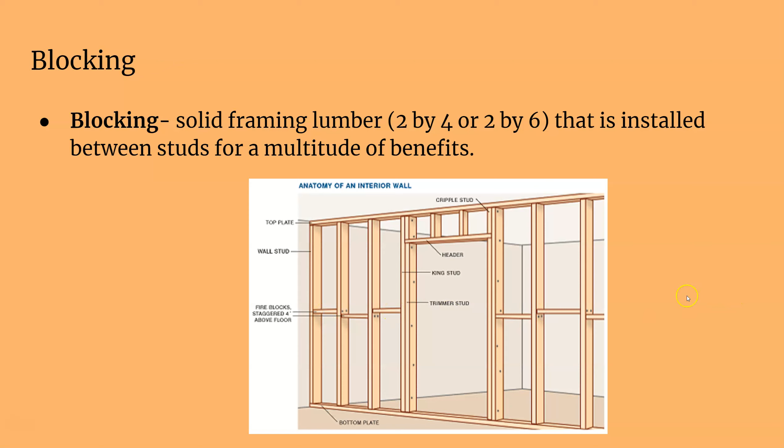For one, it stiffens up your wall. If you got an 8, 10-foot wall, 12-foot wall, those studs are going a long way from the top to the bottom with little to no support in the middle. Especially if you have long walls with no breaks in it, that don't have any doors or windows. You need something to stiffen those middle 2x studs up. So you put these blocking in, and it really shores up your wall.

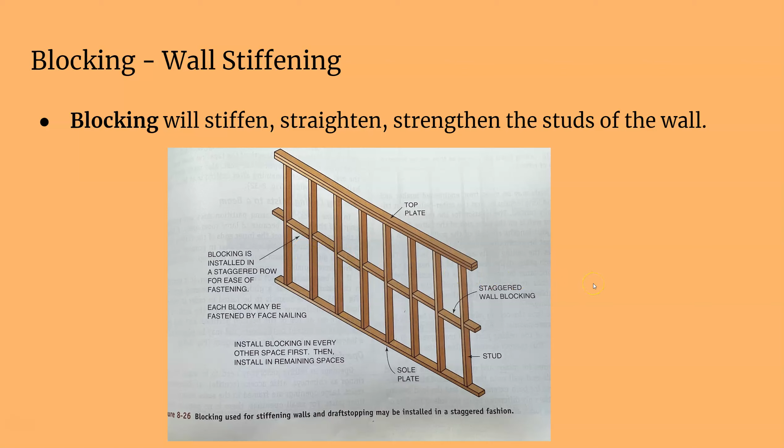The next reason is for fire prevention. So you put this blocking in somewhere in the middle of your wall, and if there's a flame that starts inside the wall, such as an electrical fire, the flame would stop at your blocking and have to burn that up before it reached over to your second floor. So that's why it's important to have your fire blocking. You try to prevent the fire from spreading to the next floor and from spreading more quickly throughout the stud bay.

Even though it's a wooden block, if the fire takes 5 minutes to burn through that block, that's 5 extra minutes to put out the fire or save someone. So it's good to have that anytime you have to save people or do what you gotta do during a fire. Anytime you can save is good.

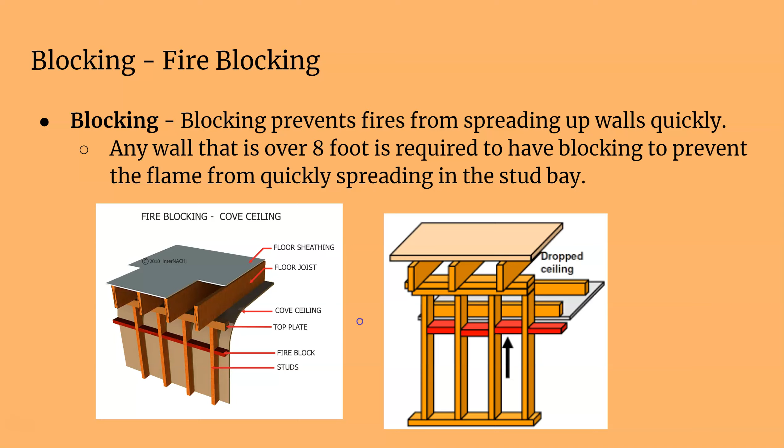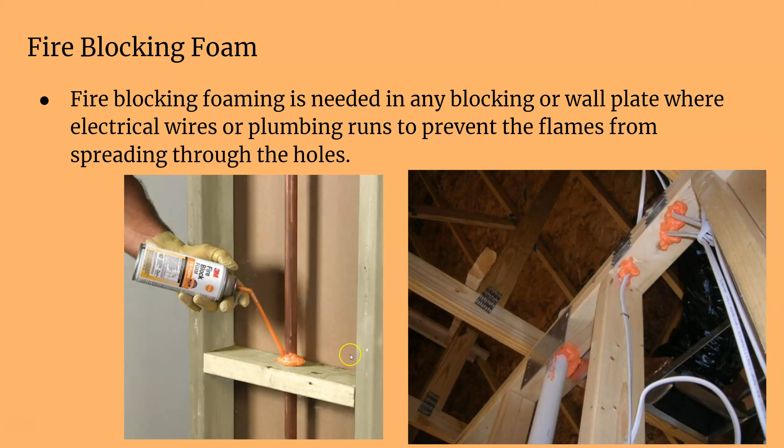So what about these pipes and everything that's running through your plates? You have to actually spray that with fire blocking. You create this airway when you have wires coming through, here, and here for your outlet, and air is breathing through it, and that's just fanning the fire more.

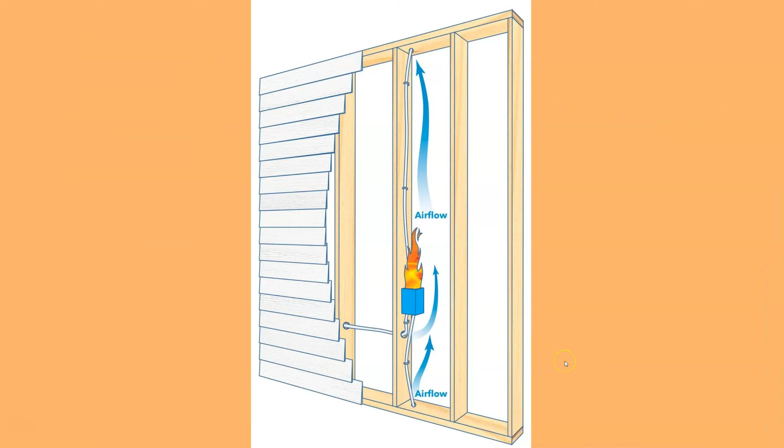If you seal that all up, the fire has no oxygen, because remember this is sided on both sides. It's not sealed perfectly tight, but it's sealed pretty good. The amount of oxygen to keep that fire going will be drastically eliminated. So you can spray this fire blocking foam around your outlets, around your plumbing, so that fire does not spread throughout your stud bays.

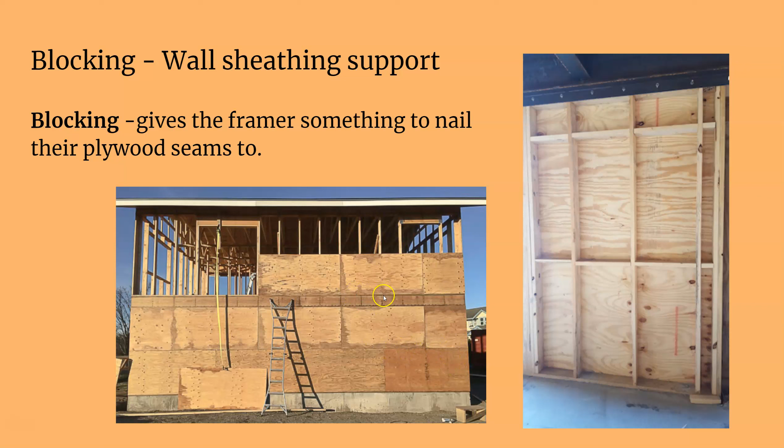And the other is a practical reason: you can nail your sheathing. This is a tall building. It's not like you just stand an 8-footer up and it covers everything, so you gotta go horizontally. And each one of these seams and joints, that's where you're gonna be nailing it. And you can see it here.

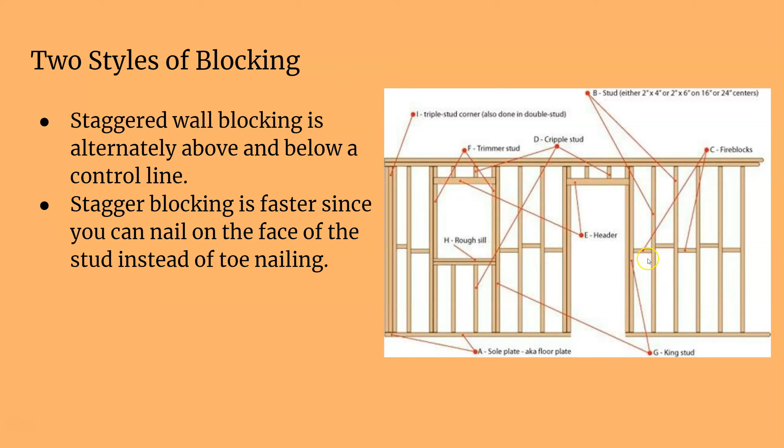There's 2 styles of doing this. You can do the staggered, which is every other. You do that because it's easy to nail in, because you're just nailing in here, and you got plenty of space. The other way is this inline blocking, which you can just line up on your walls, and you have to toenail the backside of each one of them.

So when you're doing it, let's say we started from here, you can nail in from this side, and nail in this from this side, but this one, you're going to have to toenail. You can nail this from this side, but then you have to toenail this side, and nail this side, toenail this side, and away you go.

With inline blocking, you could argue that it's a little bit more secure. Maybe, maybe not. It looks a little more professional if you can do it right. But if it's done improperly, because it's kind of hard to do, it looks really bad. But it does provide for more consistent nailing when sheathing, because it's all in one line, and that's where the edge of your sheathing is going to go. So that might help in that instance.

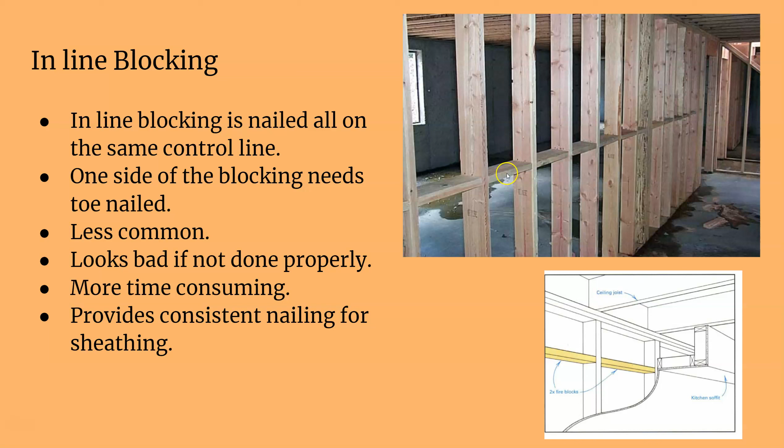You can see an installer installing blocking right here. Alright, now this is backing. Now backing is for hanging things on. It's a 2x framing member, and it's going to be on its flat face facing out. So these can be 2x4s, 2x6s, 2x8s, whatever you need.

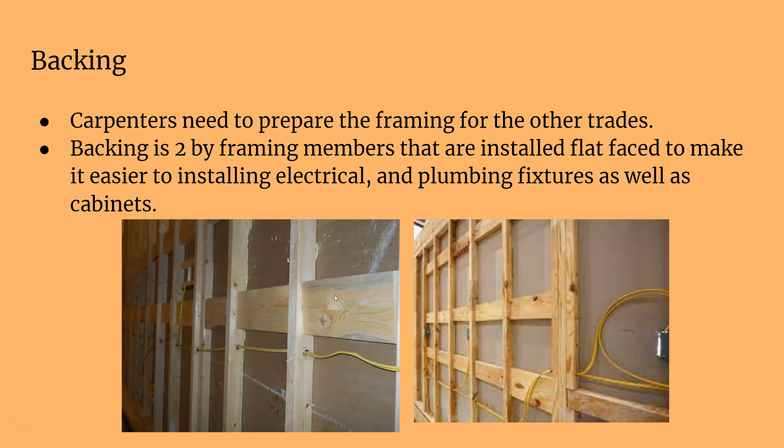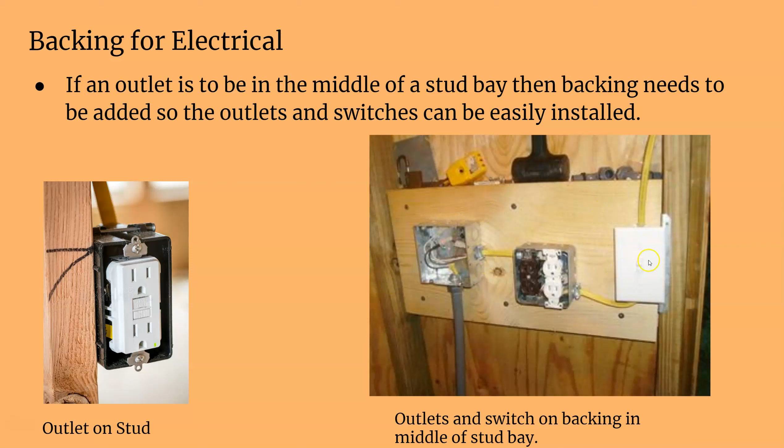And so what we're going to do is we're going to mount things to them, like these electrical boxes. Usually an outlet is on a stud, but say you don't want your outlet location on your stud, say you want it in between two studs, then you can put this backing in and you can install your outlets. Plumbing as well, kitchens and bathrooms. You get all this plumbing, and you need some kind of wood bracing behind it, your backing, to install it.

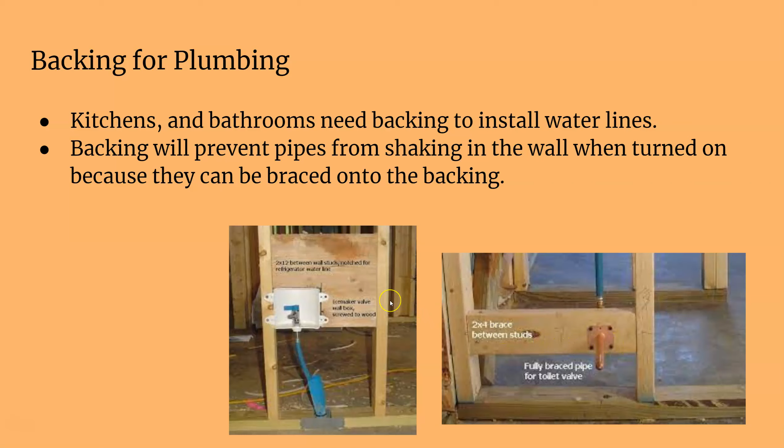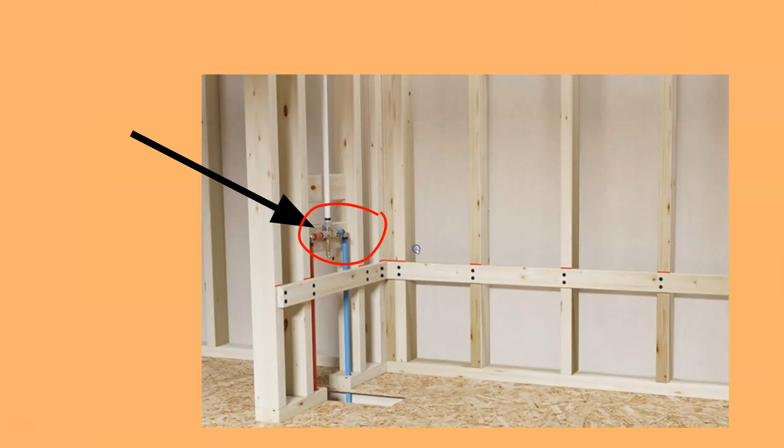All right, and this is something that is extra and is really handy to put in your house. These are backing for all your things that you're going to have in your bathroom that's going to be wear and tear, and you're going to need something strong behind it, such as your towel racks. That's constantly being pulled every single day.

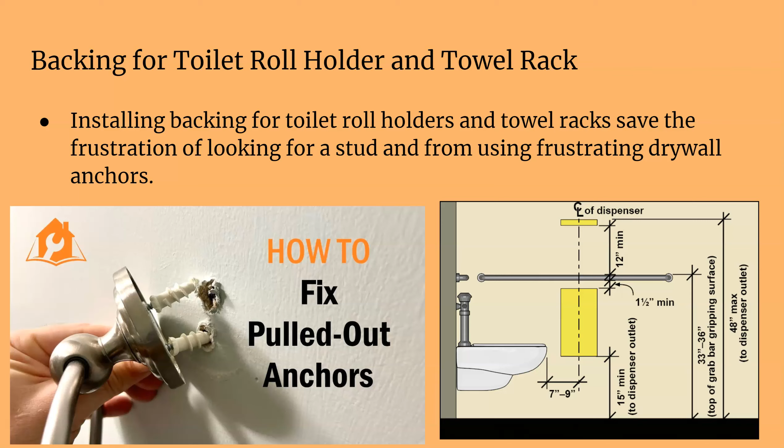It'd be nice to have some actual wood backing behind here, so you don't have to use these drywall hangers, and they really don't work all that well with a lot of pressure because they'll blow right out, as you can see here. So you got your towel rack that's constantly getting pulled on, your toilet paper roll that's going to be pulled on.

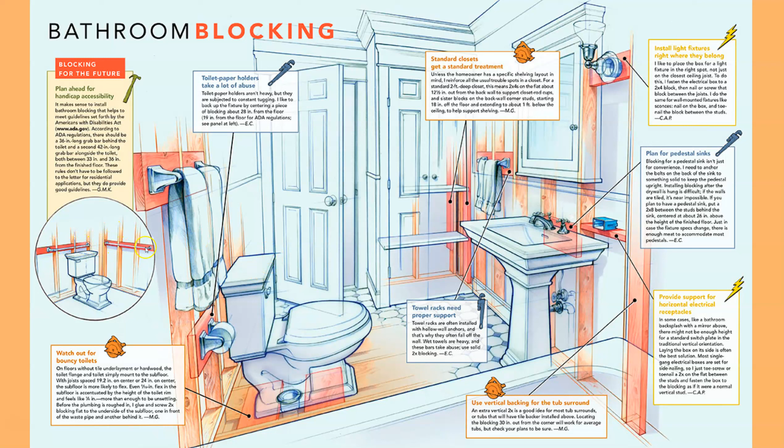Sometimes you put it underneath your toilet to stabilize it a little bit more, so it's not just resting on your subfloor, but also for your faucet. And you can mount your electrical boxes for your lights. All right, that's another way you can do it. So there's a whole bunch in your bathroom, such as a handicap bathroom. You want to be mounting these handlebars with some kind of secure backing.

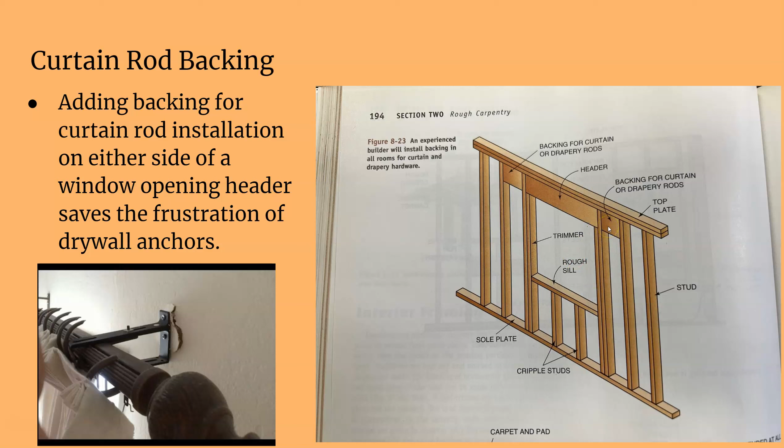Especially your curtain rods, you're going to want to make sure you have strong backing there, because when, let's say, little kids pull on it, if it's just in the drywall, it's going to peel right out. If it's in the wood backing, it's going to be very secure.

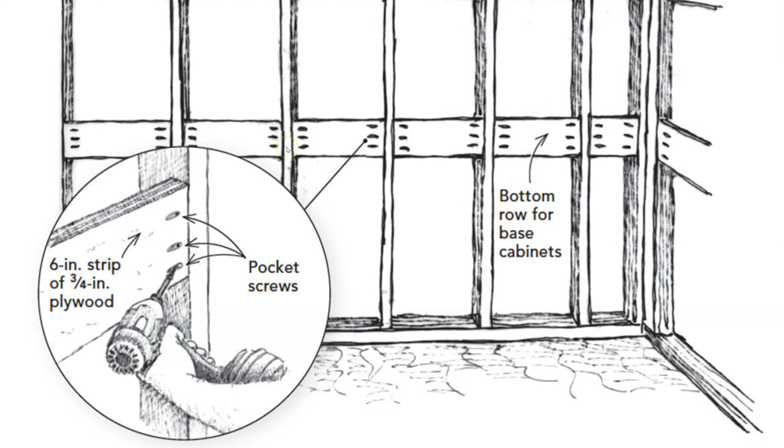Now, last but not least, you need cabinet backing, because you need something to screw your cabinets to. So it kind of looks like this. You can screw it in. This uses pocket screws to screw it in. That's one way to do it. All right, so when you're putting up the cabinets, the drywall is already installed, so you can't see where those studs are. So it's good to have plenty of space to nail to.

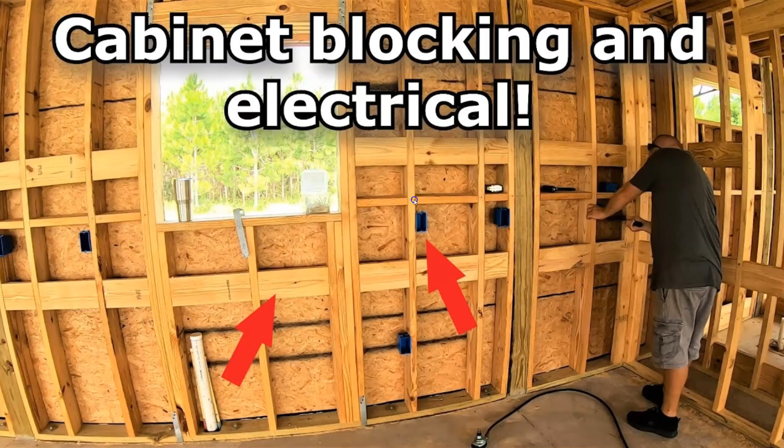So if you see here, this is the best example, you can see where the cabinets need nailed in, and the blocking lines right up. So the top of the cabinet is going to be nailed here, or screwed here. Bottom of the cabinets are going to be screwed there. So instead of trying to hit each stud as the only place to screw to, you can screw anywhere in your cabinet where you need to, into your backing, so you're good to go and make sure your cabinets are nice and secure.

All right, this was backing and blocking.